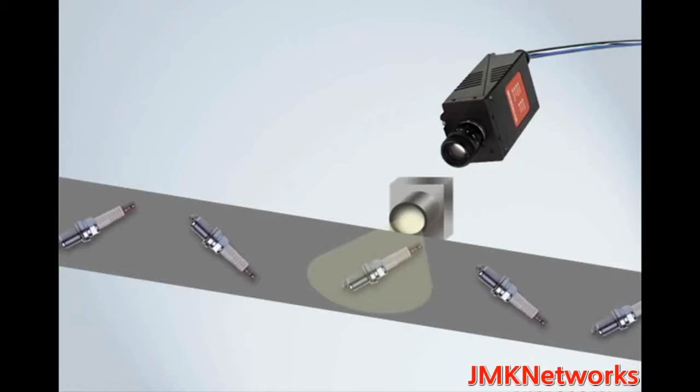First, you have a manufacturing production line with a steady flow of objects. Then you have a camera or optical system trained on the line. Next, you make sure that you have proper lighting of the line so the camera can see the necessary details.

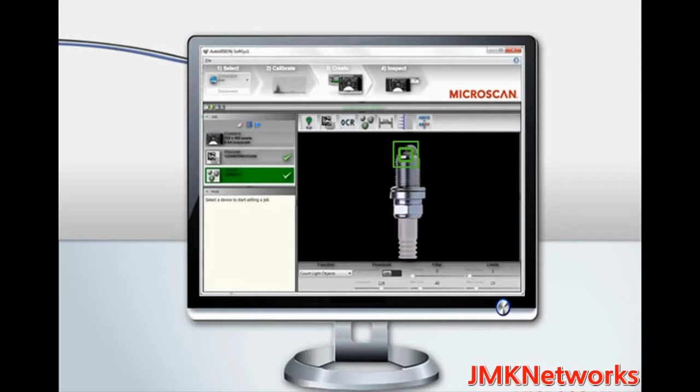The camera captures digital photographs and analyzes the images against a defined set of criteria. That's in an industrial context. There are different types of vision that are used for other purposes, but when we refer to machine vision, we're talking specifically about industrial vision as it's used in a manufacturing environment.

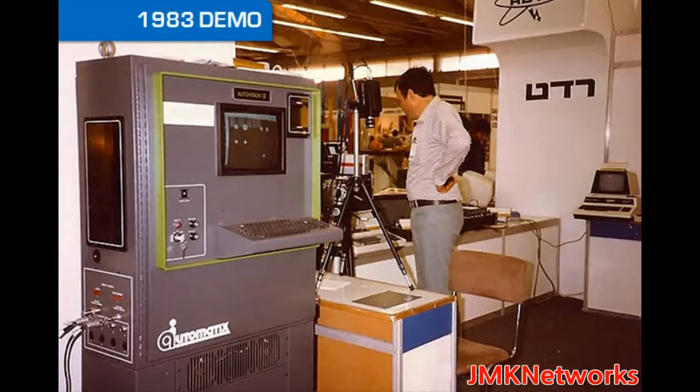Manufacturers use automated machine vision instead of human inspectors because it's faster, more consistent, and works for longer periods of time. Vision technology got its start in the 1950s, but the widespread use of machine vision in industry arose in the 1980s and 90s. This photo, taken from the Wikipedia entry on machine vision, shows a pioneering demonstration at a 1983 trade show of a system by Automatix, which is now part of Microscan.

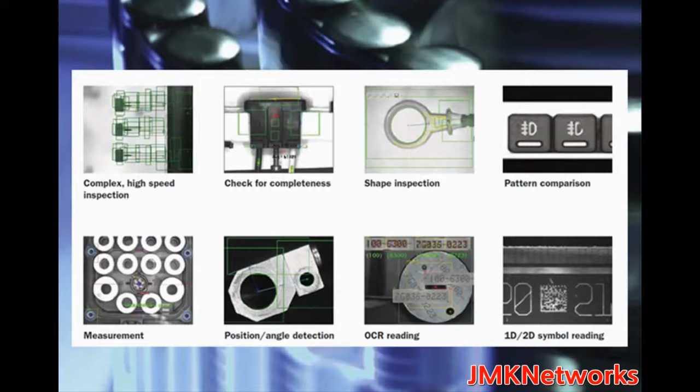Of course, machine vision has come a long way since then, and is now used for many different valuable processes in manufacturing. Let's talk about some of the most common applications of machine vision. As it has developed, machine vision's applications have grown into 4 basic functions: measurement, counting, location, and decoding.

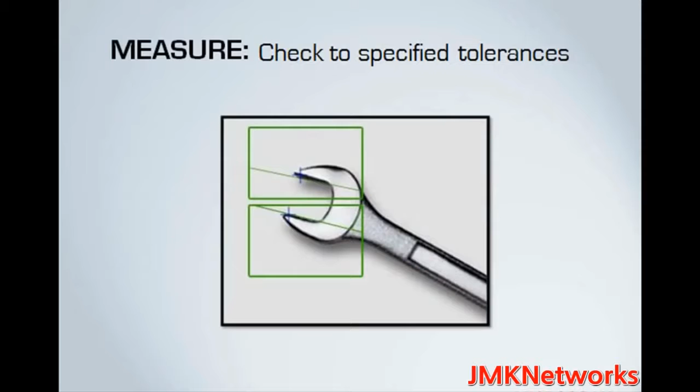Since its start, machine vision has been widely used for measurement, and by this we mean the automated measurement by a machine. That measurement can then be checked to a specified tolerance. For example, something we've been doing for years with machine vision is measuring the gap in spark plugs. As you may know, this gap needs to be a certain width, or the car won't run as well. Therefore, this gap measurement is an extremely critical spec for the part.

We can use a camera and measure the spark plug gap by machine. This eliminates the need for a person to be there to measure and adjust the gap manually. We can automate the process and do it more quickly and accurately.

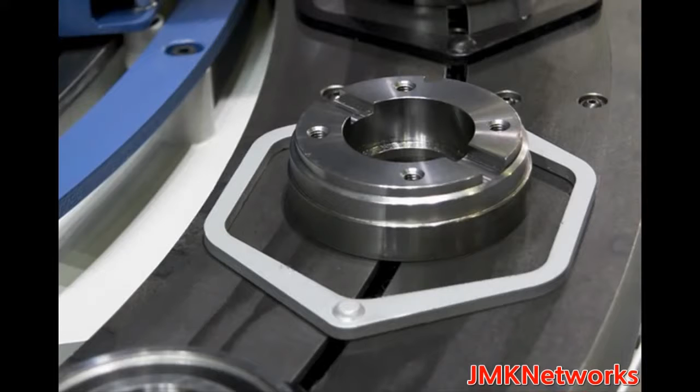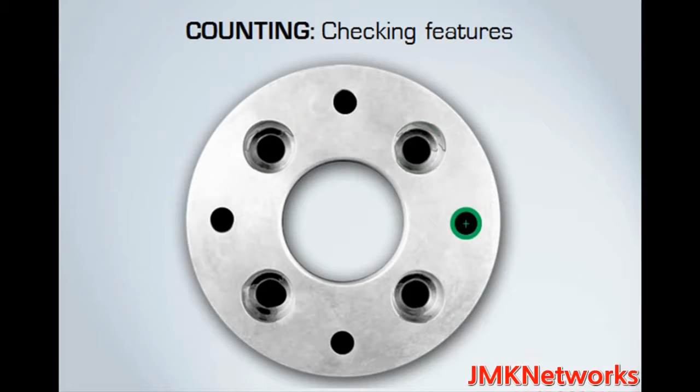Counting is another typical machine vision application. There are a few different tasks that fall under this category, but basically, counting means to look for a number of parts or a number of features on a part. This allows us to locate missing parts and ensure that products are assembled properly. This example shows an aluminum flange with some holes drilled in it. If you count the number of holes, you'll see that there are exactly 8 of them. Assuming that we wanted 8 holes, we know that the drilling process was done properly.

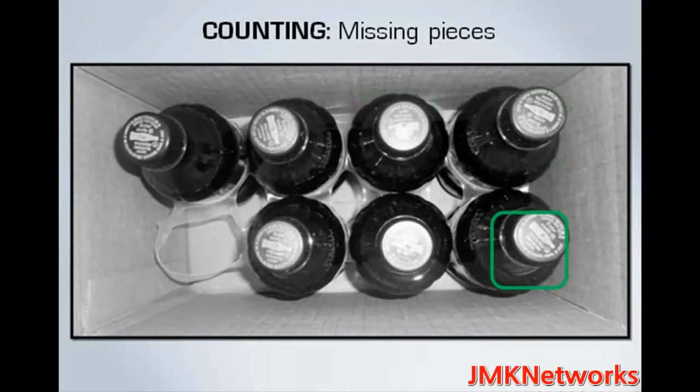Another counting function is absence/presence. Is it there or not? Here we have an 8-pack of sodas, and you can see that one of the sodas is missing. With machine vision, that packaging can be checked to make sure an incomplete pack doesn't make it to the grocery store shelf. We've slowed the process down so you can see it, but machine vision systems can operate much faster.

Location is when machine vision is used to report the position and orientation of a part. This may be done for several reasons. We can locate the position and orientation, and then check that to a specified tolerance. So, in other words, you're looking at the part to make sure that it's at the correct angle, and using that as a reference point to verify proper assembly.

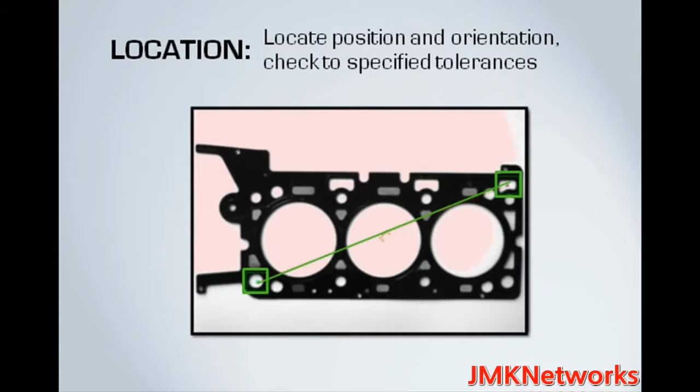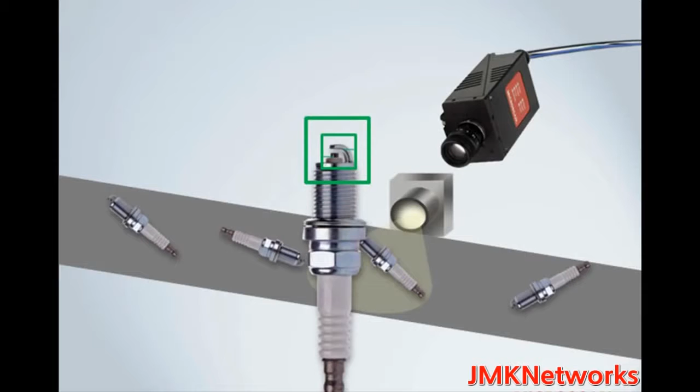You can also use this for alignment to other machine vision tools. Let's take our spark plug example. This is a very powerful feature in machine vision. Your parts may be facing all different directions as they go down your production line, and you can locate a part, straighten the image, and then you can run other machine vision processing tools on it.

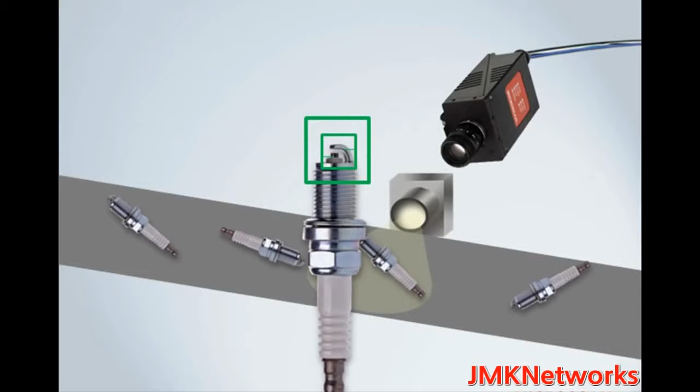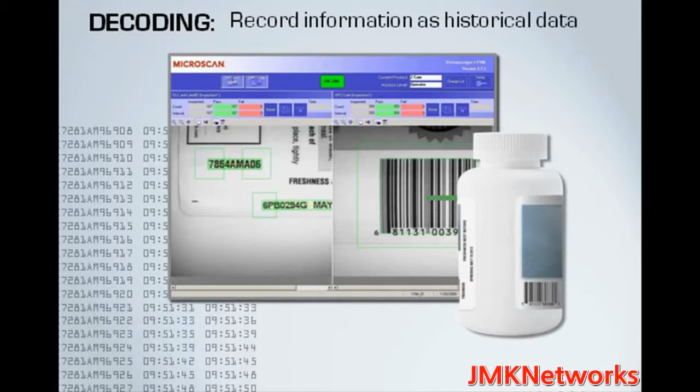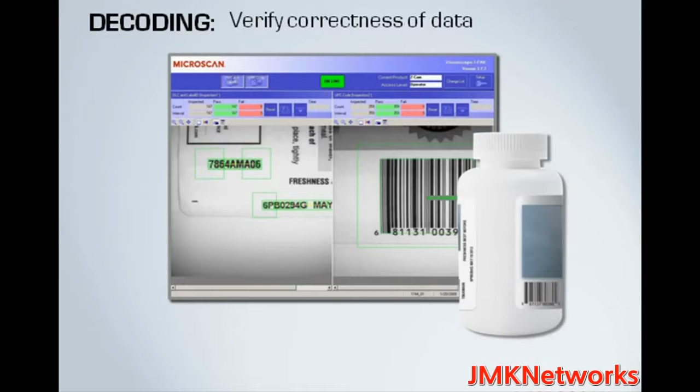Decoding is typically used to record information as historical data. That way you have a record of parts that have gone through a process. You can track the path that a part took through that process and use that data for immediate action, meaning that you can look at the data and sort based on what it says. You can also validate the data for correctness. When you read a marked code on an object, you can verify that the data in the mark is correct, or that the format of the data is correct, or that you have the correct product going down a production line.

An obvious question here is, why use machine vision to do this, when dedicated auto ID systems would do the same thing? You might think of machine vision as auto ID or barcode reading plus. The plus is the ability to run other measurements and operations in combination with the reading of barcodes or text. For example, you might want to read a label, and also check that it's properly aligned to the product. In other cases, you may need the ability of a machine vision system to tackle tougher applications that require more capability in terms of image pre-processing, or in the case of a PC-based system, sheer speed and processing power.

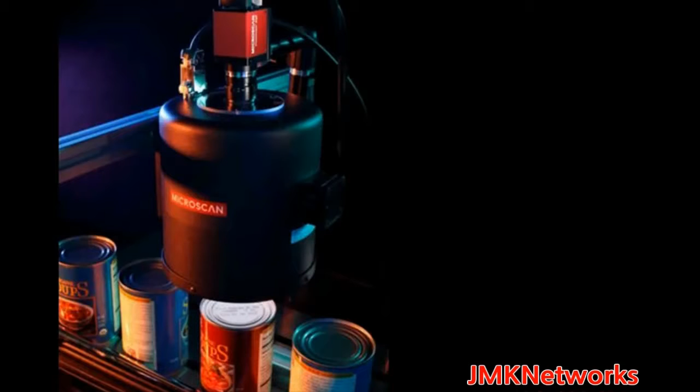An example of this sort of application is reading the OCR code on a can of vegetables during a high-speed canning process. You may not realize that when vegetables are put into cans, they are usually done so with no labels, and the only indication of what's inside is a text code on the end of it. When the time comes to put the label on the can, a vision system checks the code on the end of the can to make sure that the right vegetable is inside the can and matches the label.

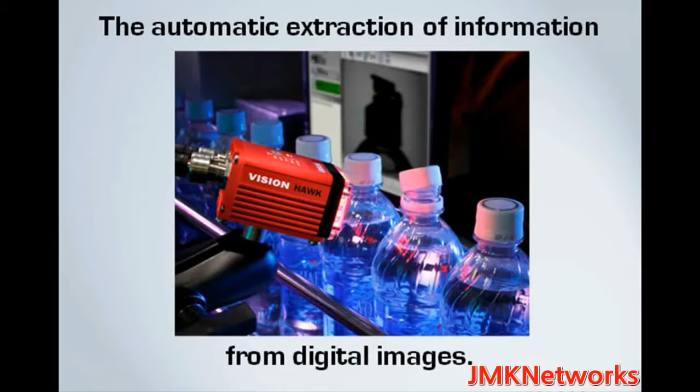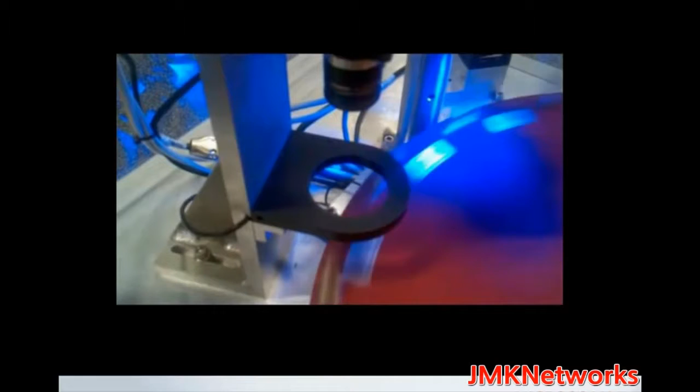So, let's review. Machine vision is the automatic extraction of information from digital images. And we talked about the common manufacturing applications of machine vision, which generally fall under 4 basic functions: measurement, counting, location, and decoding. The visual examples we've shown you here are mostly slowed down so you can see what's happening. In reality, machine vision can operate much faster, processing hundreds, or in some cases, even thousands of pieces per minute.

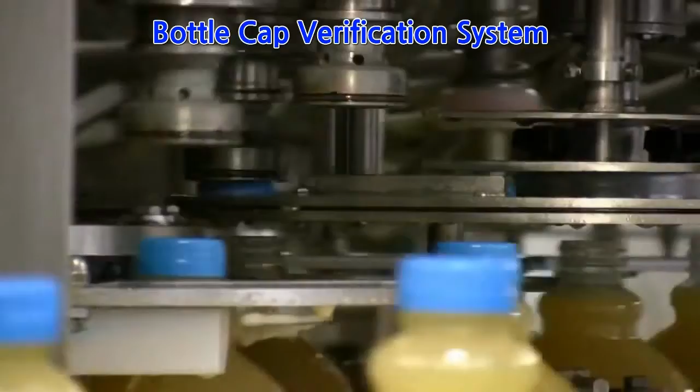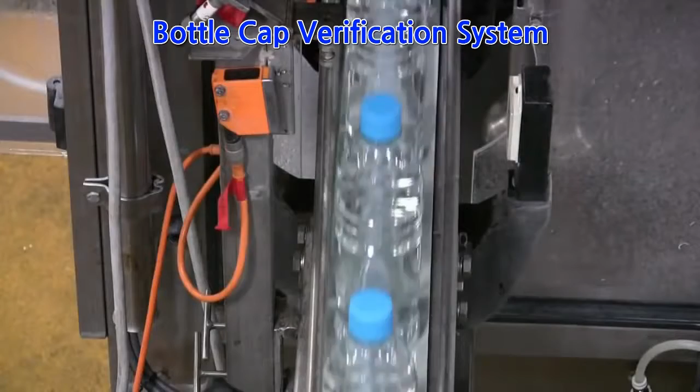The Q-Check cap verification system checks bottles for any incorrectly assembled or missing closures. A complete quality control of the cap area prevents drink contamination and spillage.

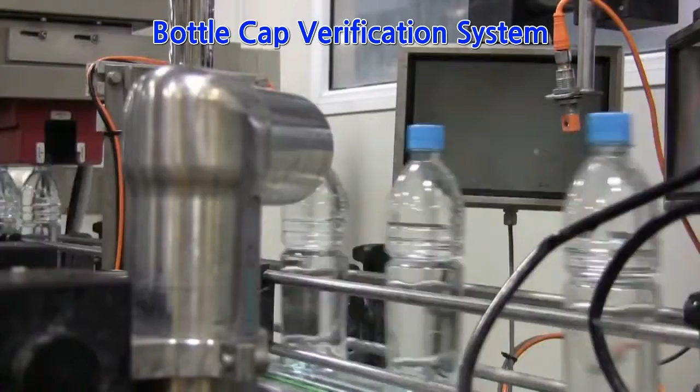The cam sensor smart camera measures key parameters of the cap referenced from the bottle. A cam console visual interface shows operators the inspection of the current production run. Failed products are rejected at the speed of the moving conveyor.